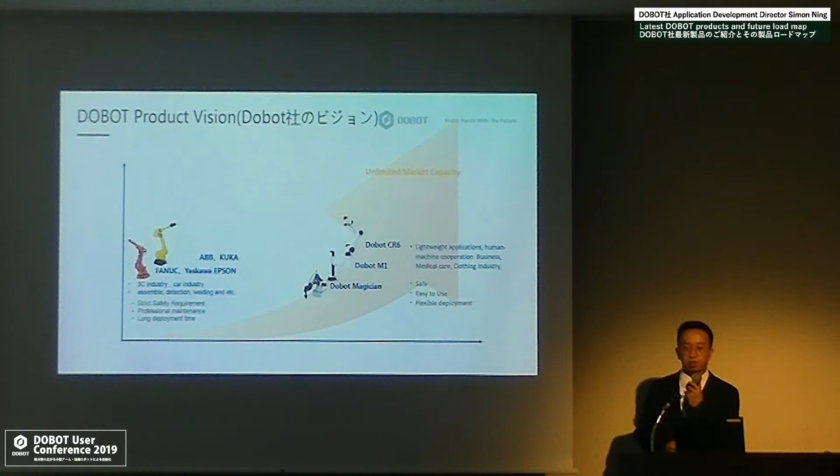TechShare is our very good partner. We have over 3,000 institutes and enterprises using our robots, and we have more than 20,000 users, because a lot of our education robots are also used in the education field.

Our company thinks highly of R&D, research and development. We have more than 416 intellectual properties, among which 41 are software patents, and 14 of them are international patents of invention. We applied for more than 100 this year, and we have over 300 staff, 60% of them in our R&D department, and over 25% of them have a doctor or master degree.

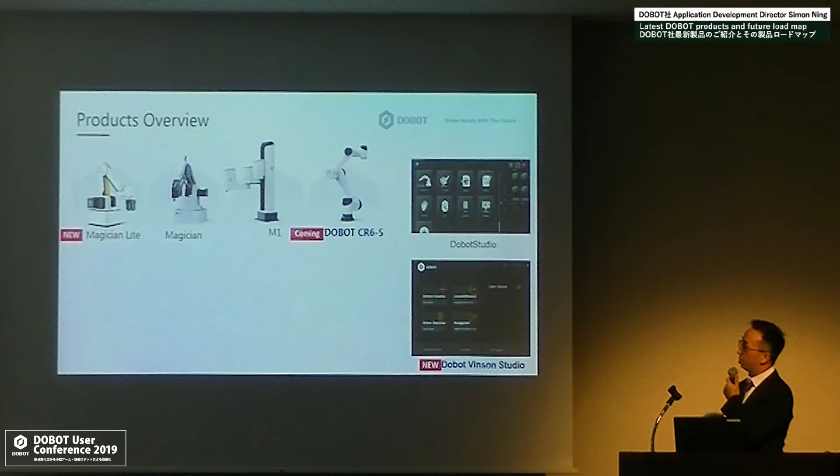These 2 new products are launched this year. Magician Lite is mainly used for education. We also launched our new 6-axis collaborative robot. It's already launched, but the massive production, we're still doing some final tests and turning it into massive production. So it will be launched next year.

We are also developing some new products. It looks like the traditional robots, like 4-axis, 6-axis, and for different payload, different working range. And here is a roadmap.

First of all, providing good service for our current users is very important. We will continuously upgrade our current products with the latest technology we have, and add new features to make our robots easier to use and have better performance.

And the 6-axis collaborative robot product is coming in the second quarter of 2020.

For the software, now we have M1 Studio and DOBOT Studio. Next year, we are going to launch our new software platform, DOBOT Studio 2.0. The beta version, I think, will come in the first quarter of next year, and the formal version will come in the middle of the year.

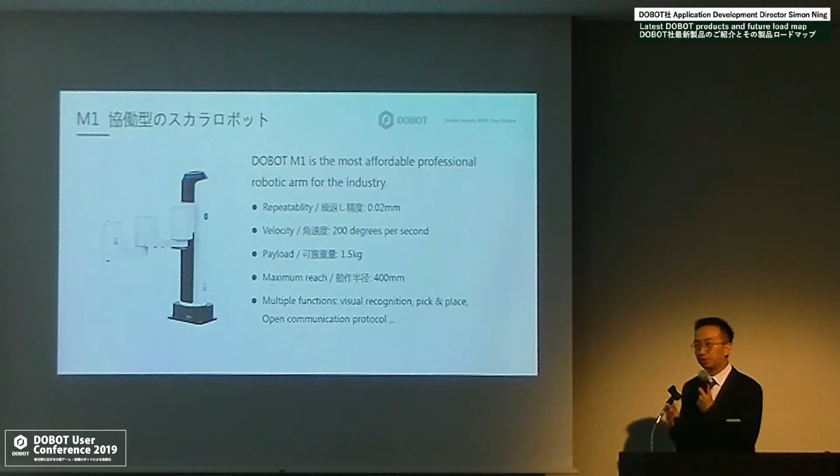We also have multiple functions for vision, for pick and place, and we also provide an open communication protocol for researchers and for new applications.

The CR6-5 is our new generation of non-programming, self-learning, and intelligent 6-axis robot. It's a collaborative robot that can effectively help speed up the industrial automation process.

It has a payload of 5 kilo and a reach of 902 millimeters. The maximum speed is around 3,000 millimeters per second, and the repeatability is 0.03 millimeters. It's actually similar to the Universal Robot 5, UR5.

Here is a video we showed in September, some demos we showed at the robot exhibition.

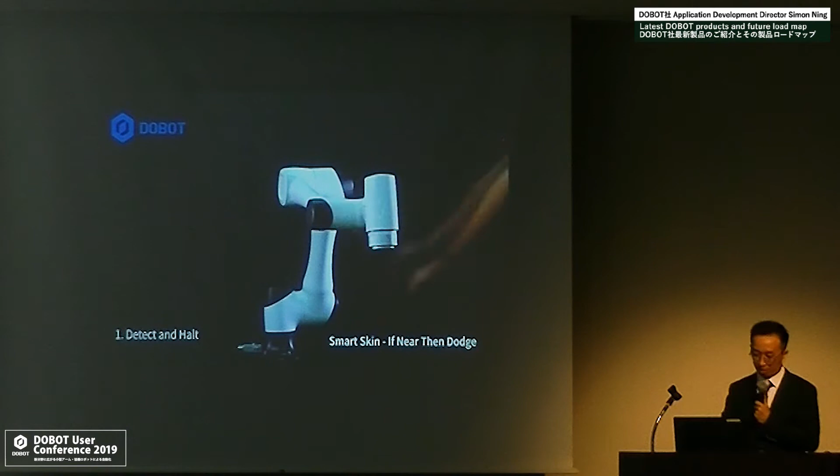Let's see if I can. Do we have the voice?

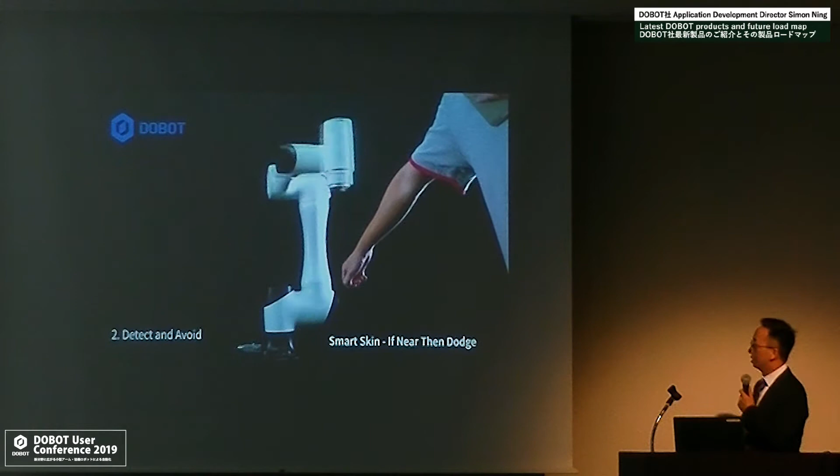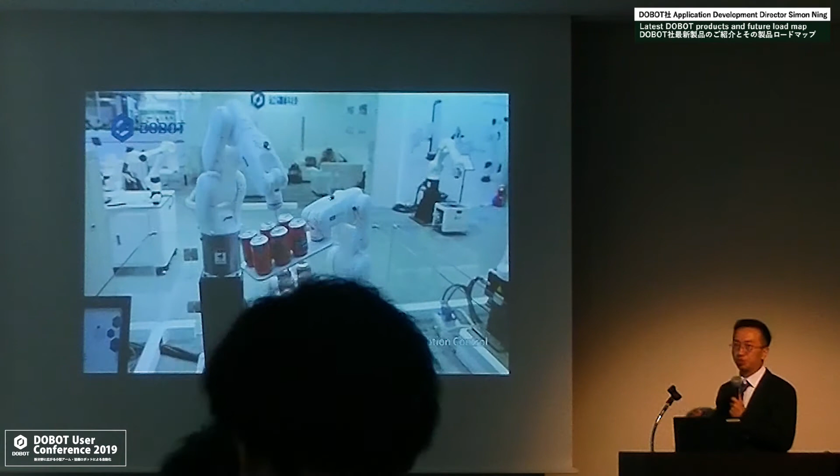Okay, it's okay. Because it's a collaborative robot, it can have collision detection, and for the last view you see over there is an electronic skin.

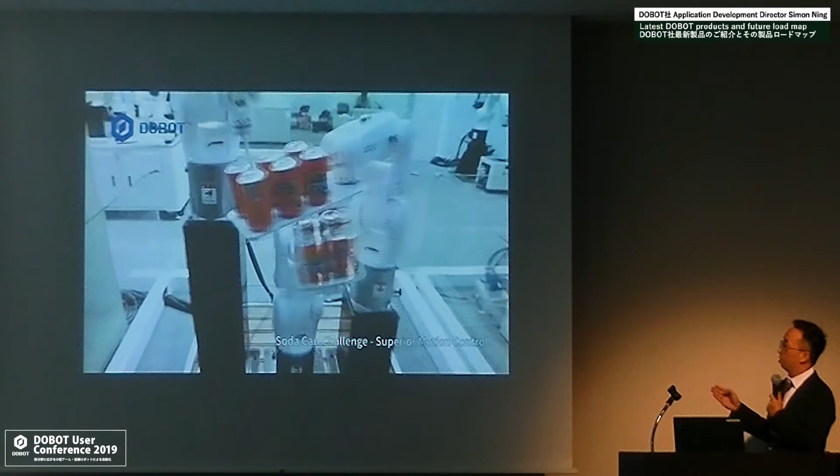Because we have handhold teaching, it can be taught in a short time. This is a demonstration for 3D vision. We have a 3D vision camera over the top, and it can see the picture and tell the robot to pick up a certain one. This is also superior motion control. These two robots are programmed in one controller, and it can do the work simultaneously with very good precision as well.

Next is a short introduction about our Vision Studio. We want to use this software to make machine vision easier because we know machine vision is widely used in manufacturing. For this software, we have feature matching, alignment, barcode and QR code detection, blob analysis, ROI configuration, and other functions. Most important, we integrate our robot control into this vision software, so you can easily build up a robot vision system in a short time.

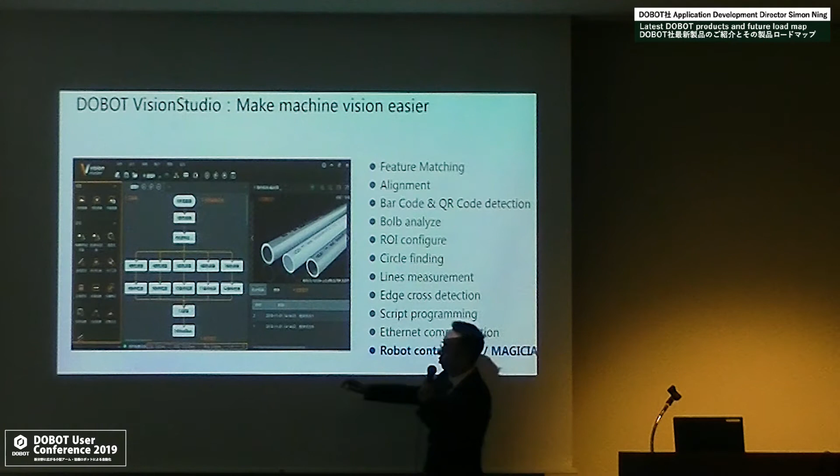These are a lot of the tools we have inside this software. In the middle, it uses a flow diagram to build up the application. You draw these tools from the left part to the workspace, click on it, set some parameters, and the algorithm will be fine.

I will explain some of those tools. For example, if we want to do color sampling, we have color processing - you just draw this tool and it will find the color.

We also have some measurement tools. For example, you can measure circle-to-circle measurements. So if you have components with some holes on top, you can put it onto the camera and measure the distance of those two holes to decide whether it's a good component or a bad one. You can also use our Magician robot command and M1 command to tell the robot how to pick up the component and where to put it.

We also have our communication tools here, so you can talk to PLC with I/O or Modbus. There are some other functions as well.

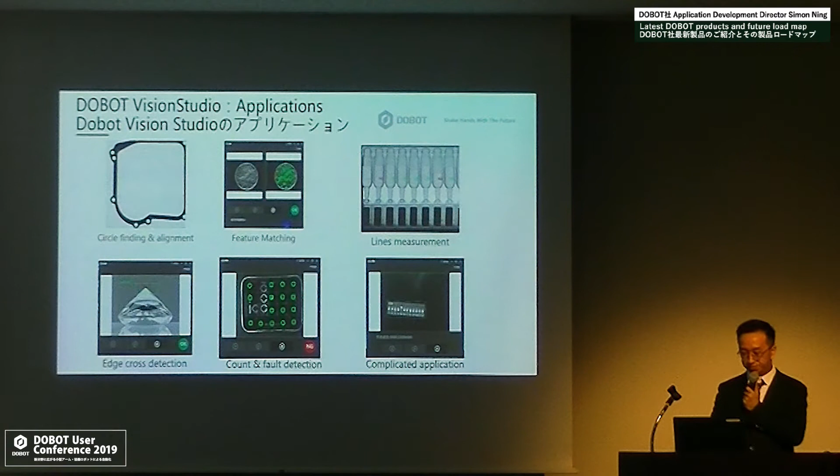The following part covers new products to be developed. We are currently planning this development, especially for the DOBOT Studio, which has already been under development for a few months. Before we show our products, since they're not developed yet, I'll just show the concepts. But before I talk about the concepts of those new products, I will show you some application and demo from our users.

Of course we are going to see more in the following speech, but this is also part of it. The first one is Chow Tai Fook, a gold jewelry company in China - one of the largest in China. This is one of my favorite examples of how Magician can do industrial work.

For gold, we all know it's very expensive. So every piece of gold, when it comes out of the mold, they want to check if the weight of this jewelry is the right number.

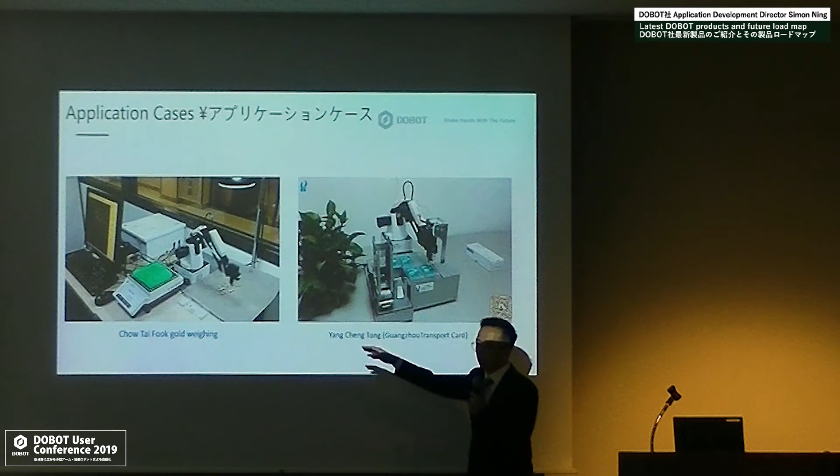And they have a very dedicated weighing machine over there. Before they had this new application, they just put the gold on this machine and wait maybe 5 to 6 seconds for it to stabilize, then pick up the gold and check if the number is right. Before, they used just a human to put one piece on, wait a few seconds, pick it up, and put another one on, waiting again. Now they can just use a camera on top with a small robot like the DOBOT Magician to easily handle this work.

The second one is a transportation company called Yang Cheng Tong, from Guangzhou in China. They bought cards from the manufacturing company for card initialization, and they also want to charge some money onto these cards. This whole process is controlled by their own workers. They used to have 5 machines and put the card on each one, waiting a few seconds, like 20 or 30 seconds, then pick them off and do another round. Now they can just use this simple machine to do this work.

For these two tasks, we can see there is not much weight requirement. Those components are very lightweight, and actually there's not much precision requirement either.

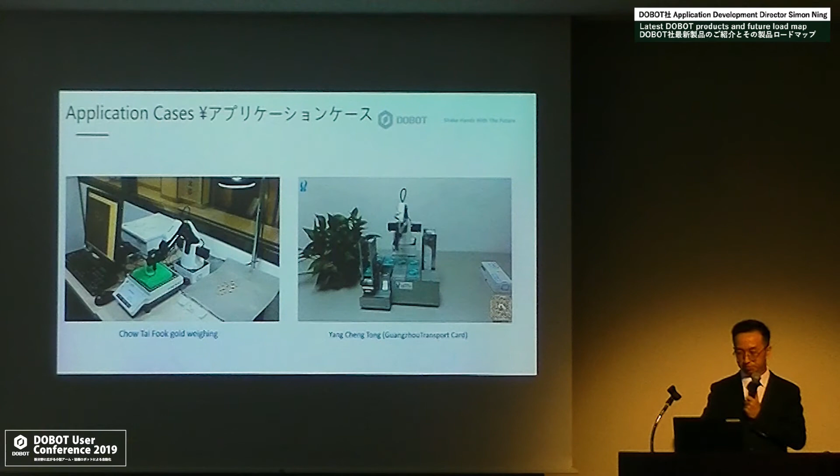Here are some examples from KV Electronics in Thailand, showing demonstration applications of human-machine cooperation. I think it's really good, and I'm really glad to see this. I'll give you a few short explanations.

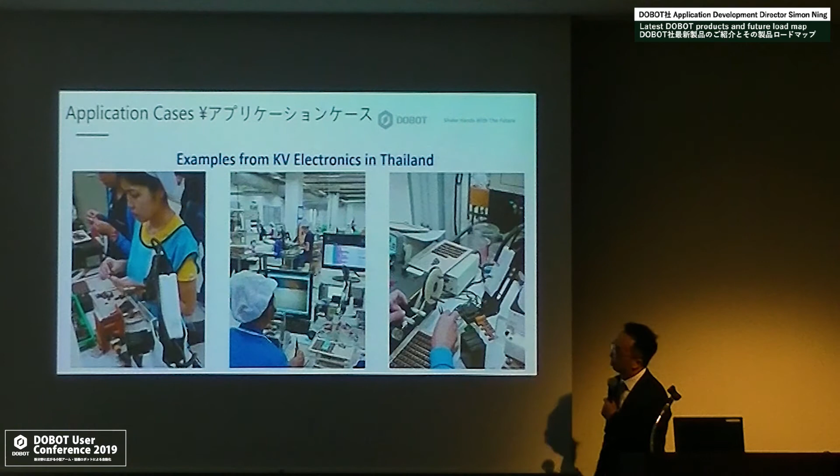In this first one, they transformed the last joint to the horizontal direction, and then the worker aligns those components on a structure held by the robot, and the robot puts it into the liquid part.

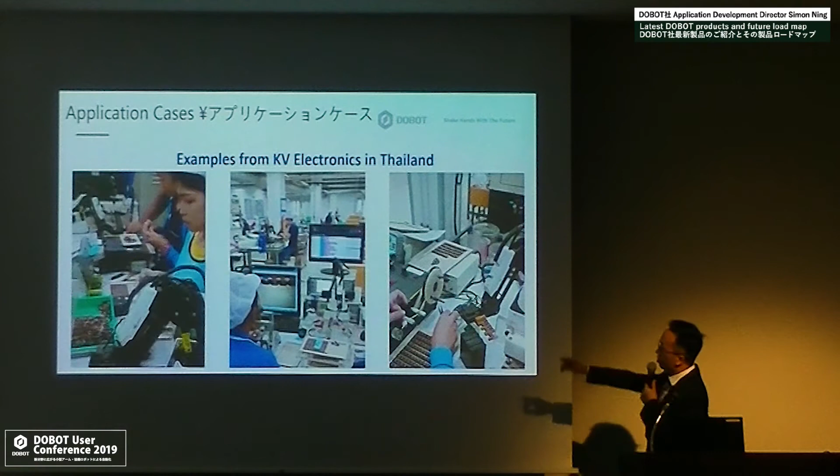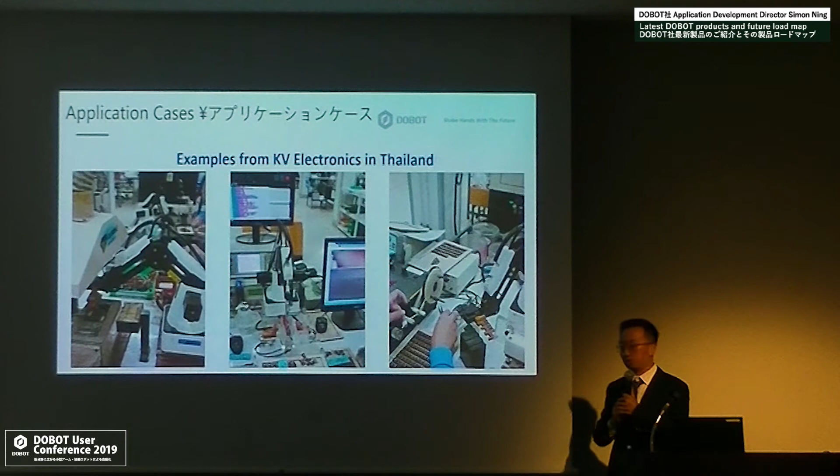The second example is a testing procedure, and they use Blockly to program this robot to do this work. You can also see there are actually 13 DOBOT Magician robots used in this factory already for 2 years.

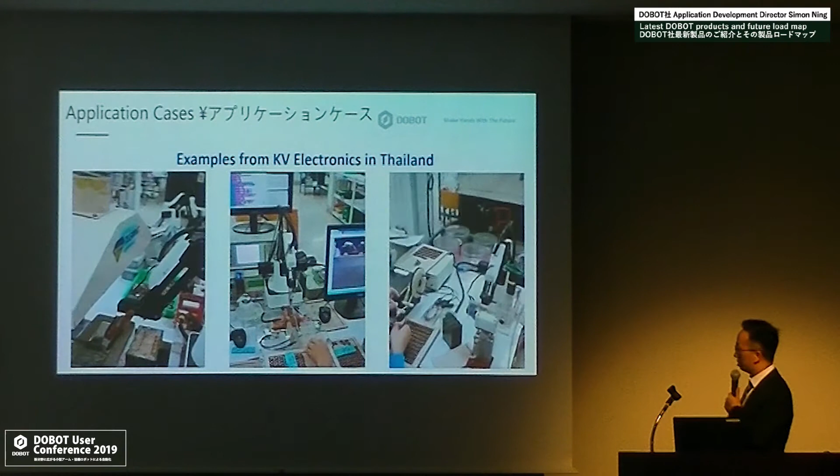The third part is also some testing procedure, where the worker just puts the components on the robot and presses the green button, and the robot will do the measurement.

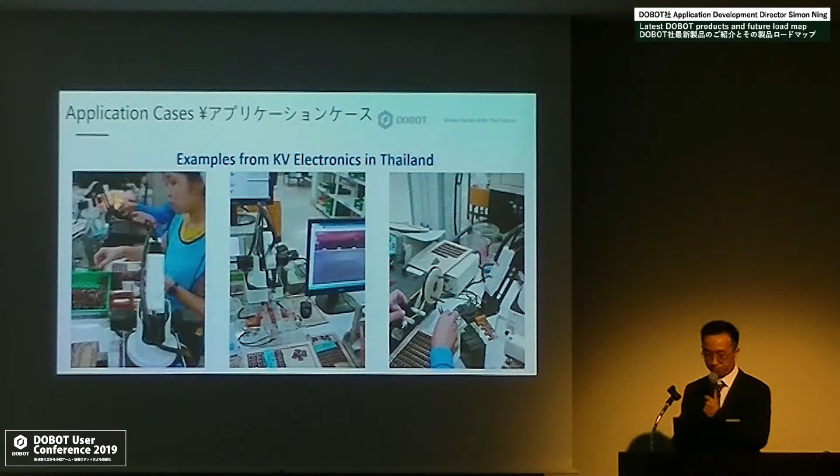These are also two examples from this company. Sorry for this video, I think it crops. Anyway, I'll explain. For this component, they need to put it into this packaging stuff. This component is like an IC, so it has a direction.

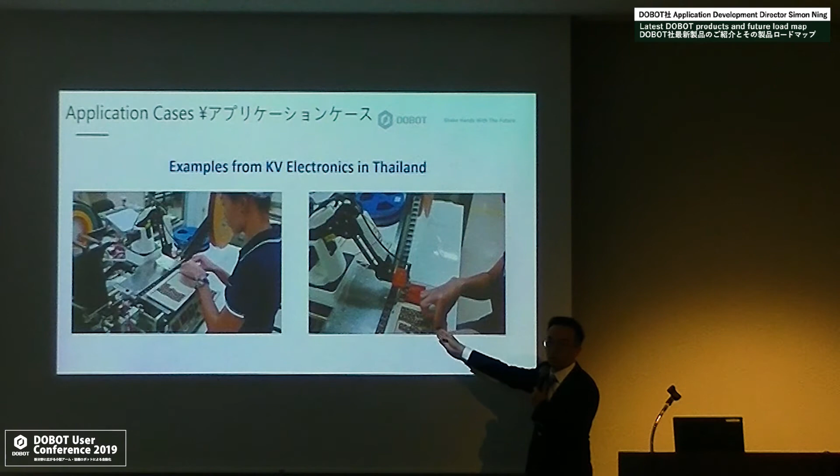If you want a human to put it inside, there may be an error and it may cause a problem because of the wrong direction. Here they have a testing machine to check if the angle is correct. The worker puts these two ICs over there to test if it's okay. If it's okay, the robot picks them up and puts them into the packaging stuff. If it's not okay, the robot will just stop there to warn the worker that it should be checked and changed to the other direction.

So those are very good examples of small robots working with human workers. Here are some common characteristics. First, for the applications, it's like material processing, quality control, packaging, and so on. They are all lightweight, small objects. Normally the payload is less than 1 kilo, and from the demos before, I think it's less than 100 grams.

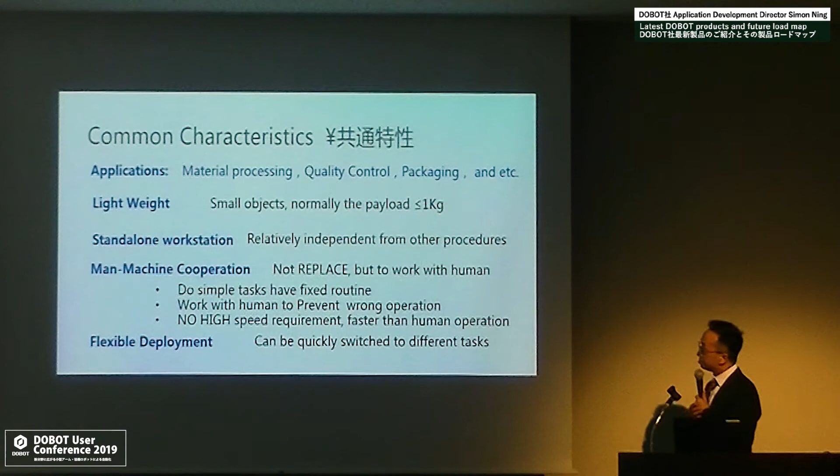They are all standalone workstations, relatively independent from other procedures. This is different from the traditional production line, where all the work is done by robots, so if one robot stops, every workstation is stopped. But for this kind of small application, they are relatively independent from each other, so it should be quickly set up.

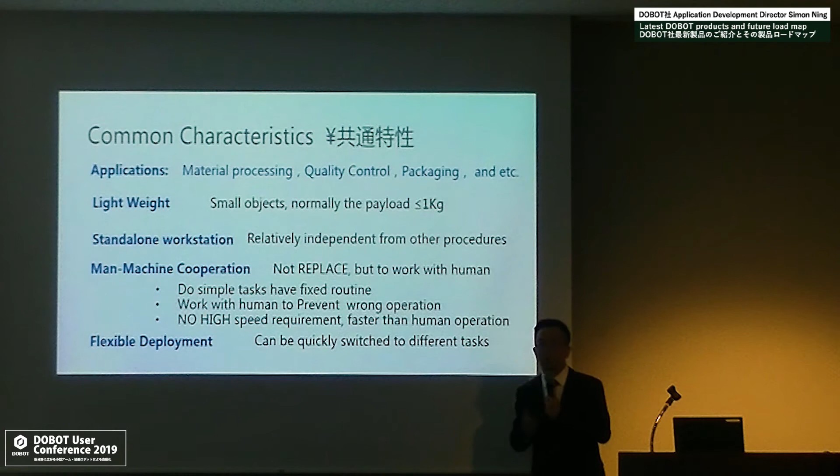I also want to stress this point: man-machine cooperation. It's not just for replacing workers. Of course, replacing is good, that's no problem, but we can also think another way: just to work with people to do the simple part. If there is some task that needs a lot of time or people to develop the application, maybe just use a robot to do the simple part, and let the other workers do the complicated part.

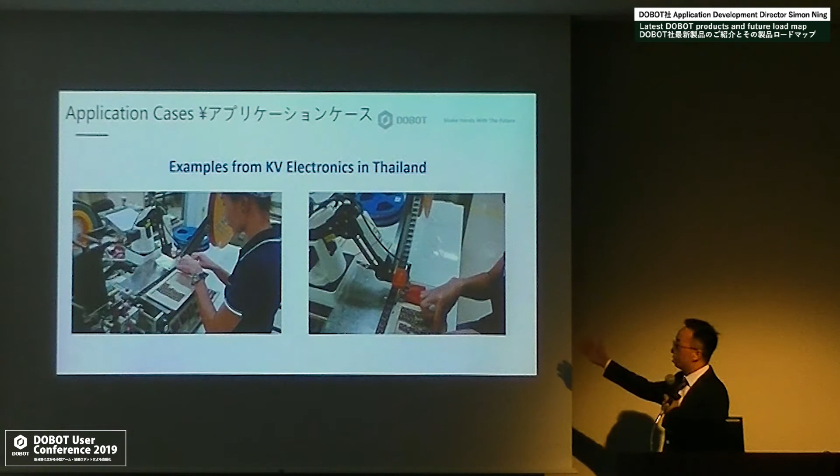It can also work with humans to prevent wrong operation, with no high speed requirement, as faster than human operation is enough. For example, for this kind of video, it's okay. Let's see if it can work.

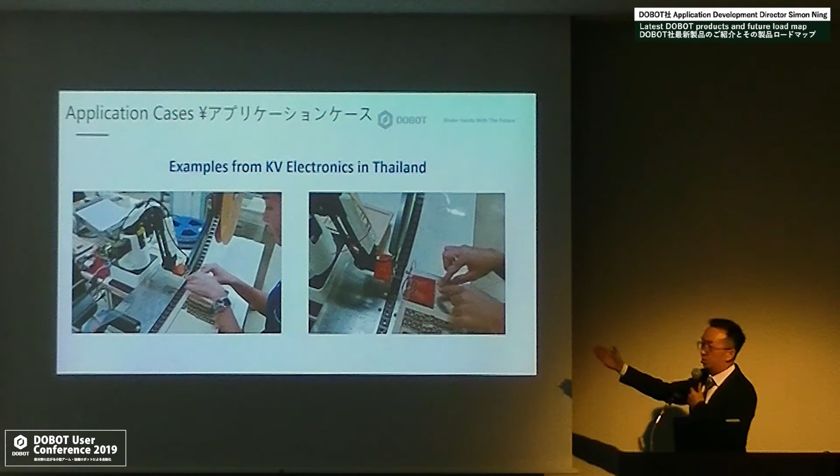For this one, the robot's speed is not very fast, but it's good enough, because this procedure is done by this worker and our robot. So no matter how fast the robot is, it doesn't matter, it's just fast enough, then this worker is good. It also needs to be flexible in deployment, so it can be quickly switched to different tasks, especially for those companies in Thailand. They don't have a big budget for automation, but they also want to apply the latest technology. So this kind of small robot can do one procedure this month, and next month they can switch to another procedure. Quickly switching to different tasks is very important for them.

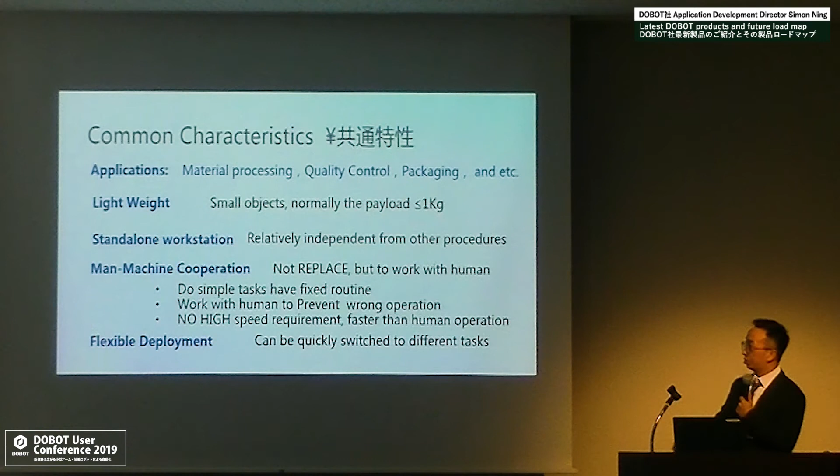With all these features, we have our thoughts on the product. First of all is DOBOT Studio 2.0. We have DOBOT Studio and M1 Studio, and now we are going to have a totally new software platform. It's not just a bug fix or an upgrade, it's totally new software. It's all-in-one software, so it will include the Magician M1 and the robot we are going to develop next year. So once you learn it, you don't need to take a long time to switch to another robot or another software.

The UI changes to make it more intuitive and user-friendly, because we see a lot of workers in the factory are not very highly educated, like master's degree or computer science. So making it easy to use is very important, and also easy to program, because the robot has to be programmed to do a certain procedure, and this is an important part.

We are also going to provide some typical application templates, so you can just use the template, do some modification, and set up the application in a short time. It should also be extensible to more application scenarios.